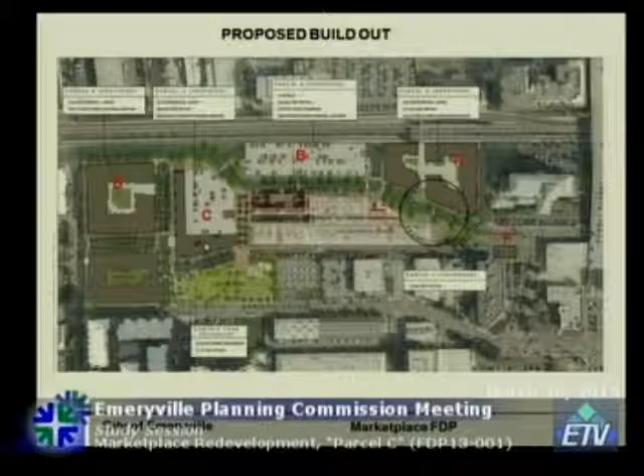At this point, the applicant has revised its phasing, and I'll talk about that. In terms of how it's actually going to pan out in construction, the first thing that's going to happen on the ground is the relocation of the Shellmound Street. This will be followed by construction of the grocery store, which is on Parcel C, and that would be without the residential component that is associated with the grocery store.

The third item would be the construction of the redesigned and expanded Christie Avenue Park, which the Commission has approved in the past, earlier this year. This would be followed by construction of Parcels A, D, and then the residential component of Parcel C. And the last stage would be construction of Parcel B, which is the garage building, and the retail pad, which is known as Parcel F.

So today, what we are going to be talking about is only Parcel C, which is the grocery store plus residential development associated with that, as well as the realignment of the Shellmound Street.

In terms of the past study sessions, in December of 2013, you first saw the first study session on this project, and that included both Parcel C and B. This was followed by another study session in December a year later, which was on the overall scheme of the proposed Marketplace Redevelopment Project. Then in January of this year, you saw an FDP study session for Parcel B and C and the realignment road.

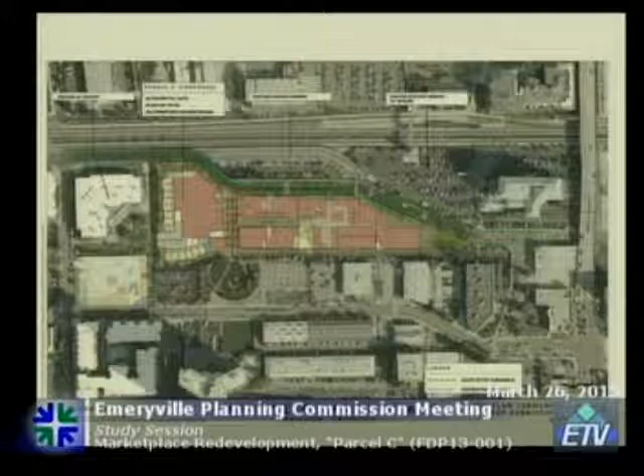What you're going to be looking at today is a more refined proposal for this project, and I'll go through the various modifications that the applicant has made in response to the comments they heard at the January study session. This is the Parcel C rendering, and this is the first floor or ground floor plan, where you have the grocery store in red, and townhouses on 62nd Street and on Market Drive.

In terms of modifications, what you see today is a reorganized loading to separate grocery loading from the customer and resident vehicular traffic. There would be a truck bay with a gate that would be closed a majority of the time. There are further defined loading areas for the grocery store on 63rd Street, and truck templates have been provided in the packet. This was directly in response to how the loading would occur and whether that was feasible or not. You also have circulation plans that more clearly show the operation of loading, service, and trash pickup, as well as vehicular, bicycle, and pedestrian movements.

Site plans and elevations of the grocery store before the residential component is added are also provided. This was again in response to the Commission's comment regarding what the building would look like between the time the grocery store is constructed and the residential is added. More refined unit plans have been provided, and a more developed rooftop amenity area is proposed, identifying a bocce court, vegetable garden planters, a covered outdoor kitchen, and a barbecue area with seating.

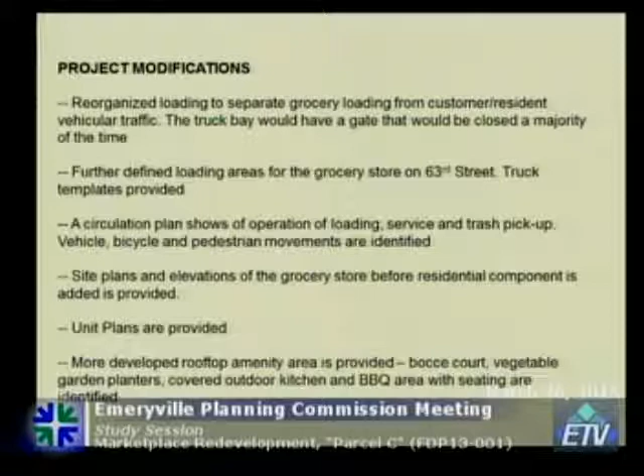In addition, there was a discussion on how the delivery details would work for this particular grocery store. Keep in mind, we still do not know which grocery store, which tenant, will be going in, but in terms of delivery, this is what we have.

On weekdays, it will be 3:30 a.m. to 1 p.m., and on weekends, 4 a.m. to noon. There was also a discussion last time about the backup beepers.

This has been identified as a concern for the adjacent residents, regardless of where the loading dock is located. In response, the applicant has indicated that all the residential units on the north side of Parcel C, as well as on the east, south, and west sides of Parcel D, the theater site, would receive noise insulation treatments that would block both the railroad noise and the backup beepers.

Do keep in mind that adjacent or kitty-corner to the grocery store, you have the Emmy building, which is almost constructed, so that's already there.

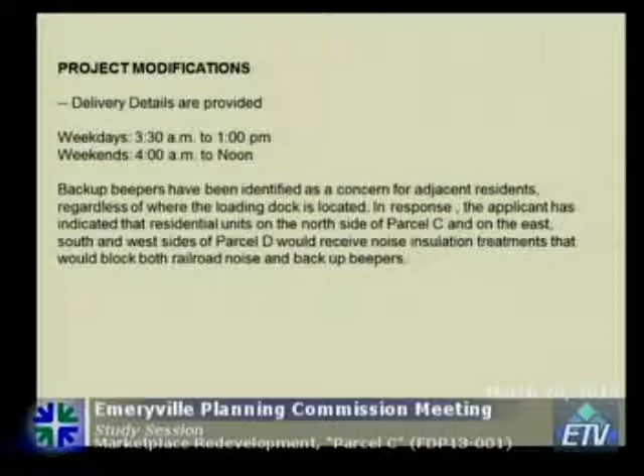I will now hand over the presentation to Arnold, our design consultant who has been working on this project. He will go through his comments, which have been outlined in the staff report.

Good evening, thank you. I'm not going to try to take up too much of your time. I want to point out a few things and let the project architect present their project.

I just want to start with the current proposal. Just to note, I've probably seen this in the plans. On this one, you notice it does show the double entrance point into the garage, and it does show some slight changes in the layout of the building footprint on the Shellmound side.

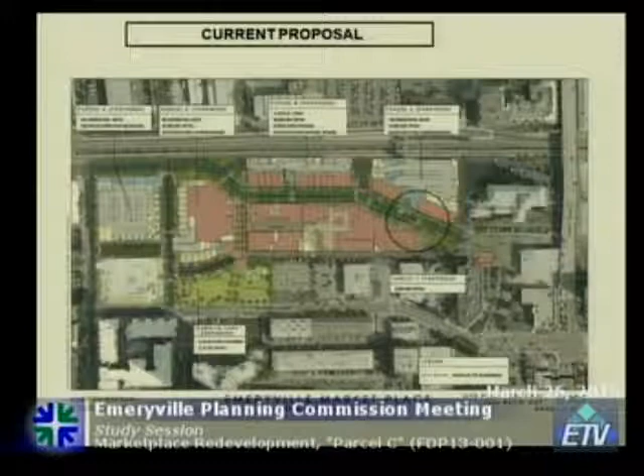And I'll move forward, and you can see it here where they have the two entry points now. So it's a little bit wider than it was before, so there's a visual effect on the street there. And also the entry into the grocery store, you see it was previously curved at that corner. Now those two things have been straightened at that corner.

So we'll come back to this. And there was one more townhouse along the 62nd Street side. So they dropped from like 8 to 7 on that side.

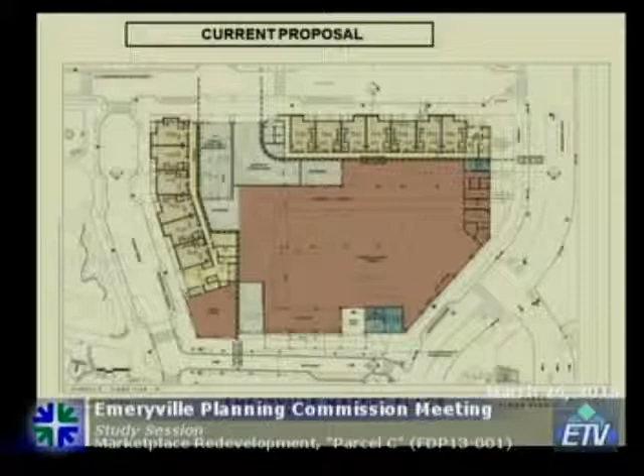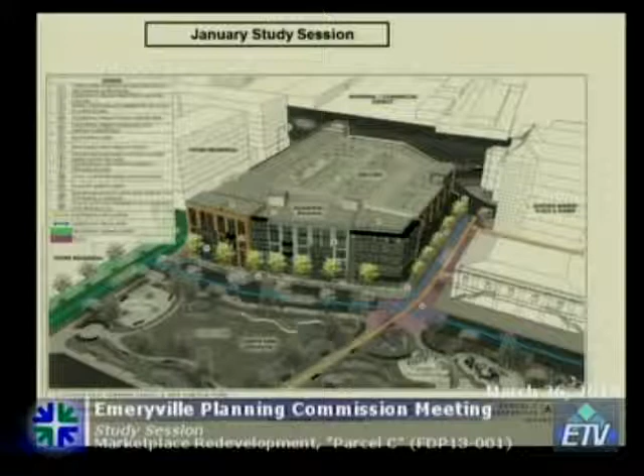And then when you're going to the current proposal, one thing I want to point out is the amount of mechanical and the size of mechanical things has increased quite a bit, so there's a concern about their visibility. You see that they're on the front side near the entry to the grocery and possibly visible from Shellmound. So I just wanted to make sure everyone was aware of that.

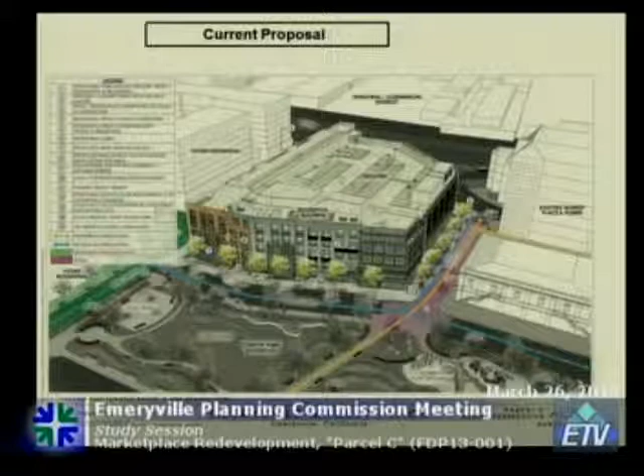This was the January study session, kind of perspective, a very nice perspective, and it showed an intention to curve that corner so as you came down Shellmound, you get a real sort of good identity to that building, and something at the top that connected into it so it would go through and up to the penthouse where the access was.

Now this did show the areas to the side that were open, and they've changed that also. But there's been some changes. Again, this is the January version.

You see the roof level configuration of the access down and the ground level, and then the elevation there. You also notice on the elevation, at the far right side, there's a brick at the corner, facing the park also as it turns that corner.

Now you notice in the current proposal, it's changed quite a bit where you're not getting that curved feature. The building's been straightened out. The identity is not quite the same, and the penthouse features are more of separate structures on the roof. So there's a concern that maybe it's taken a slight step backwards in this area in terms of how that experience might be coming down Shellmound, and that would be something we wanted to point out for your comment.

Can you go back to the January proposal for a second? I just want to, okay, thanks. Okay.

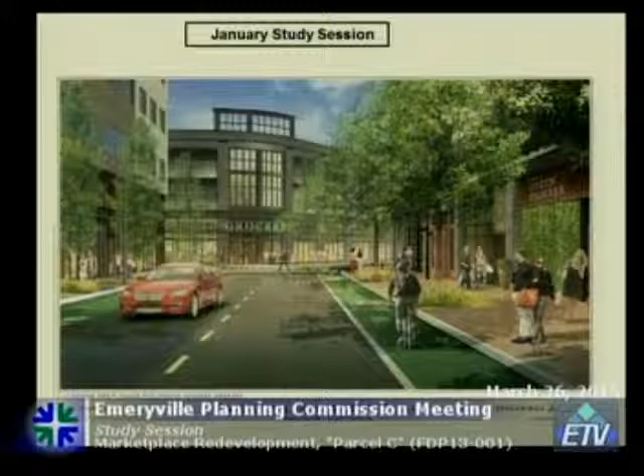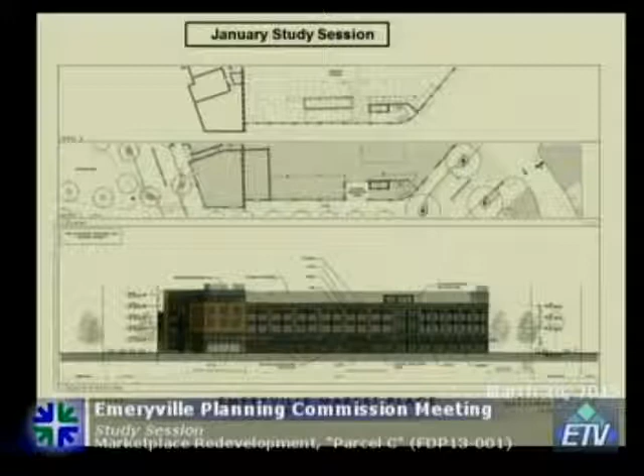That was the entry. If you look at the top drawing, you see the stair and the elevators, and they had the facade kind of continue up to contain that on the outside, whereas on the current version, it's a set back penthouse. Now it's set back from that, and they also have a kind of canopy created up there.

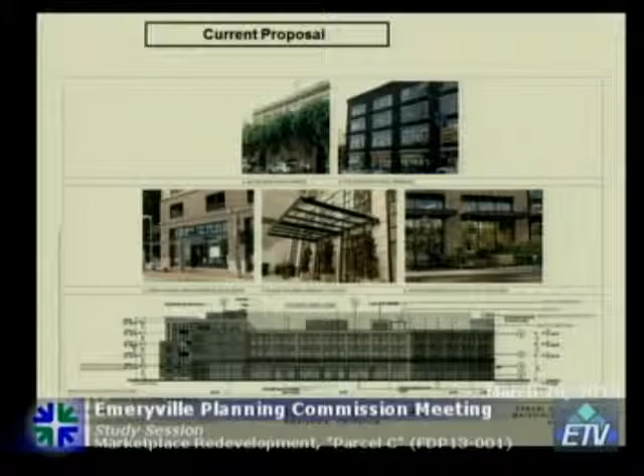This is just the elevation that's currently proposed, and the shaded areas up top show where those mechanical spaces are, almost at the center, and then the access point is a little more to the right. Again, you can see in section where those things occur and the relative height of those elements. So that element seems fairly tall, so that's part of the concern also.

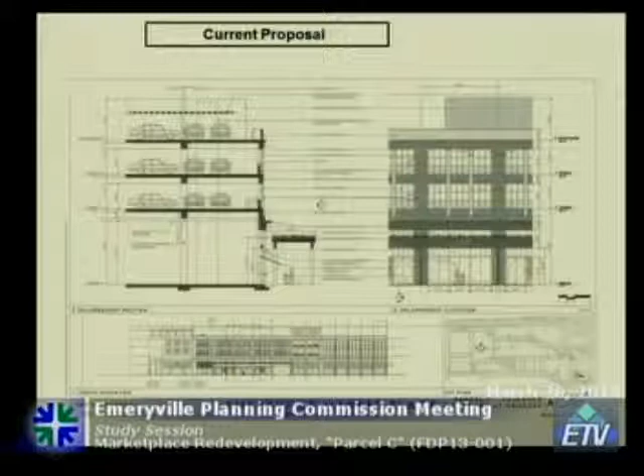Okay, and you're also seeing the grids that they put in to mimic the window frames. That was a change from the earlier one, which is a positive change, I think.

Wanted to go over a little bit of the park side too. You notice here, the main point is the brick is at that corner, wrapping the corner in the January version, and at the top, it's hard to see, but there's a trellis that wraps all the way around the corner. Now on this latest version, that's been changed to more of a stucco presentation, so you don't have quite the contrast or the anchoring of the corner that you had on the other one.

So to go back, hold on a second. There was the brick, and then the metal and the brick, and the upper floor was set back and of a different material. Now it's sort of blends in with the stucco.

And then there were some concerns about how the development of those trellis elements really comes across. They don't seem right now to be developed that much, so we would be looking to see what those are really going to look like.

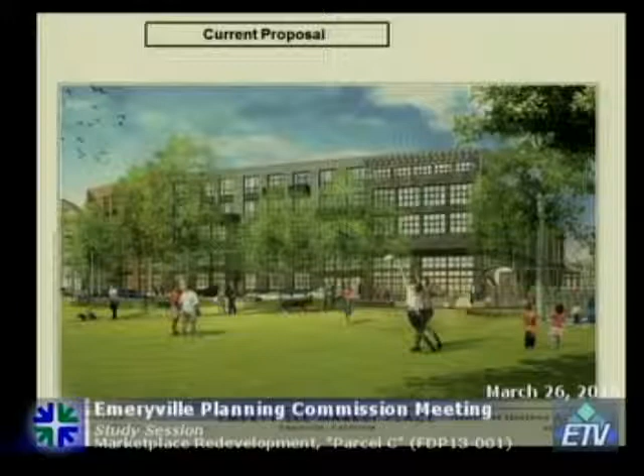The other street, which faces Parcel D, so we have the townhomes facing each other on a residential street. This was the January session. The main point I want to make is that the top level was set back with a continuous trellis all the way along, so the scale was a little bit different, giving more of a horizontal presentation.

And in the new one, it's still attractive and has nice massing, but it's just a little bit different, and they're accentuating the vertical elements a little bit more. Again, those trellises up top seem like they're maybe just placeholders, not really quite what they might be.

Also, on this one, I want to point out the window frames. This has that warehouse type of aesthetic a lot more, and the windows look like warehouse windows. You typically would see those metal windows in this image.

And of course, here's just the elevation. You see the pictures that go with it. They're showing some typical window frames that you might see in that type of building.

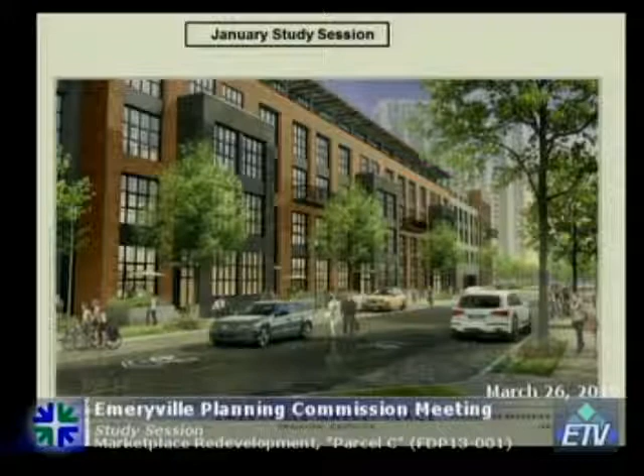Could you flip that elevation back to the January version just quickly? This one? Yeah, that one. Okay, thank you. Yeah, I just want... yeah, I know it's a lot. Okay, so I'll go back. So then, this is the current version.

Is the plan the same, or do the floor plans change too? The floor plans, I believe, are pretty close, except at the top floor, they're a little bit different. The units have been evolving. In fact, I want to mention that some of the comments about the unit plans were actually on an earlier set of drawings than the ones you received. So if some of the comments seem to make no sense at all, it's for good reason, because the units are different.

But I think they're working on the units, and they're working on the massing of the building too.

The one other thing I wanted to call attention to in this drawing is the entrances to the loading and the vehicular access coming in off of 62nd. Of course, it's much wider now, so there's some concern about breaking that pattern. There's a door, I believe, on the loading, and we don't have much information on what that's going to look like, but having these two large entrances next to each other does kind of break that pattern a little bit, and that's a constraint that just has to be dealt with as best as possible.

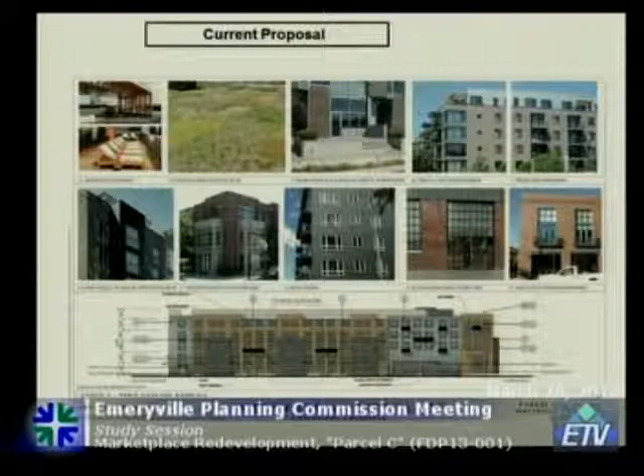This image, I wanted to talk about this one briefly, and I believe, hopefully it's still current—you guys will correct me if it's not. This was from the end of February submittal.

The two issues on this one: one is the windows. This calls out vinyl frame windows, so we don't have much information on those yet, but typically with vinyl sash windows, without really seeing exactly what these frames look like and how they fit in, it's unclear if they're going to portray the character of the structure, or if they're going to look like something different. So that's something there's a concern to clarify.

The stucco and the brick and the setbacks all look like really positive features, giving it a very urbane look to the building. We don't really know what the stucco finish is going to be like, and we're interested to find out more about that. But the windows are an issue.

A second issue is privacy. You'll notice that for the units along the street, the plans currently call out an 18-inch level change from the sidewalk to the unit, and what we don't know is whether 18 inches is the minimum or the maximum, since there might be some sloping on the street. 18 inches is not very much of a level change, so you have the problem of people looking into the units. Our recommendation is to increase that to at least 24 inches, because we want the windows to be as big as possible—these are very deep units and we want to get as much light into them as possible.

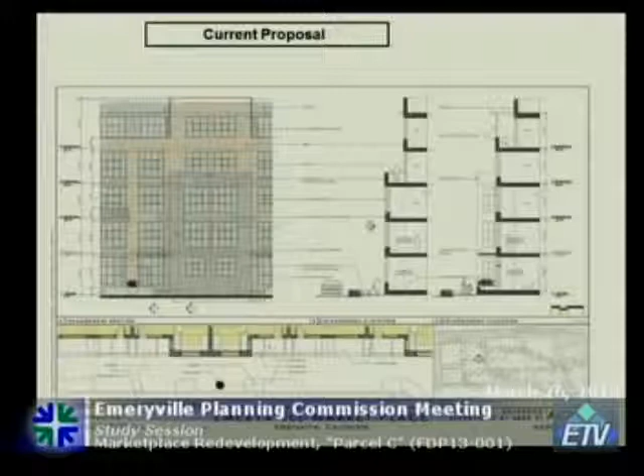So this privacy issue is something we'd want to see looked at, and preferably raising that floor level some. These are the current units—only want to make a few comments. These are the ones where I was mentioning comments in the staff report were from a package slightly earlier than this, so it might not match in all cases.

A little bit of a concern on some of the units—these are one-bedroom units, I really don't want to look at those right now. These units are mixed up, but on the two-bedroom units, there's a concern about the table and living area not quite being big enough to really function for a family. You see that you have a sofa and a small table, and those dimensions are really tight to actually fit more people in that unit.

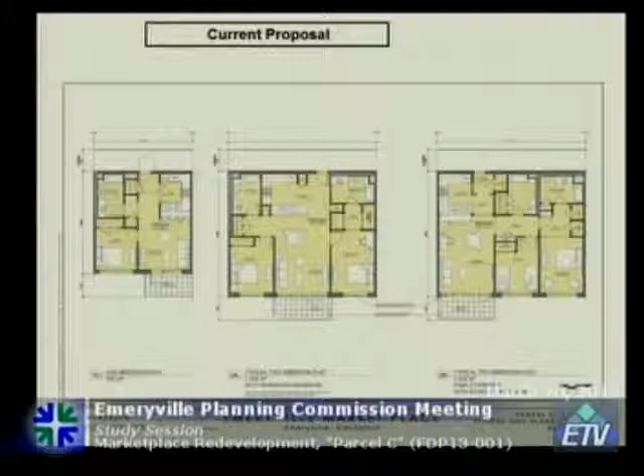You might want to notice how little space—it's a pretty big unit, but how little space actually ends up being in the living and dining area. It's only less than a quarter of the unit, around 20% of the unit on the 2B example. So that's kind of a struggle point, and at least with those units, I believe they occur facing the park. There may be opportunities to modify that—maybe rather than a deck out there, project out a bay feature or something like that to give a little more space to those units.

This is showing some of the townhouse units.

One of the things I wanted to point out is Unit C. Staff really likes that unit. It's a nice elongated corner unit that seems very well laid out for family-friendly living. There are 4 of those units, between 2 and 3 bedroom, making up about 38-39% overall, but it's mostly 2 bedroom.

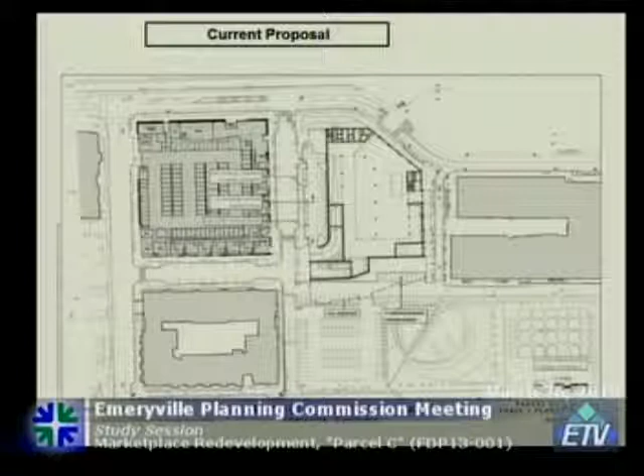Lastly, this is an area where there's not much information on this first phase and how it's really going to work. We have a parking area on the back of the grocery store, a loading dock, and the garage entry. The previous discussion was to provide some sort of temporary facade, and right now we're not really sure what that is beyond a concept. So I guess we're all looking for more information there. I think that's as much as I thought would be useful to say, unless you have any questions.

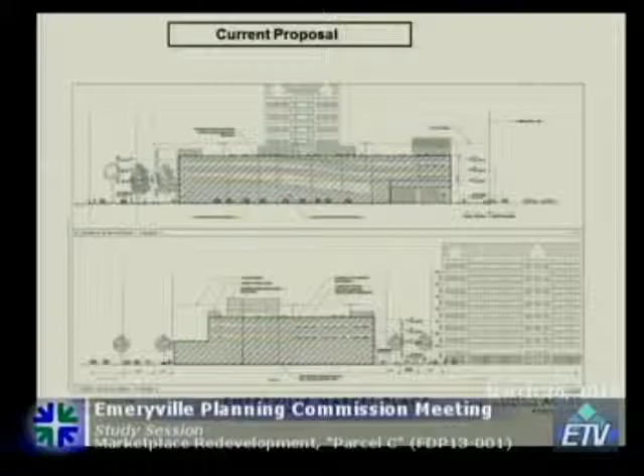Is there any kind of traffic study done yet relative to delivery trucks? Yes, we are doing the study. We don't have the results yet, but we expect that to happen very quickly, and we would have that cleared up before this project comes back for consideration.

There were some staff recommendations. One would be to go back on that front facade by the grocery store to something closer to what it was. Two would be to address the mechanical things that might be visible from the street. And three would be to go back to brick on the corner between the park and in front of the grocery store, so it gives a more balanced material presentation.

I have a question. I'm curious if you can point me—I've kind of scoured the East Bay, and I've yet to find a good example of a project that has sufficient grade separation for the ground floor residential units where residents feel comfortable opening their blinds. So I'm curious if you have a good example.

I think you're correct, it's very hard to find a good example. It's been an ongoing problem. The Essex project has that problem, and when I walked by those units, they're all kind of covered up. People are renting the units, that's not an issue, but they're all covering up the blinds. So it's a very common problem. I wish I knew one in the East Bay that really achieved that objective. It's just something we're struggling with right now. Thanks.

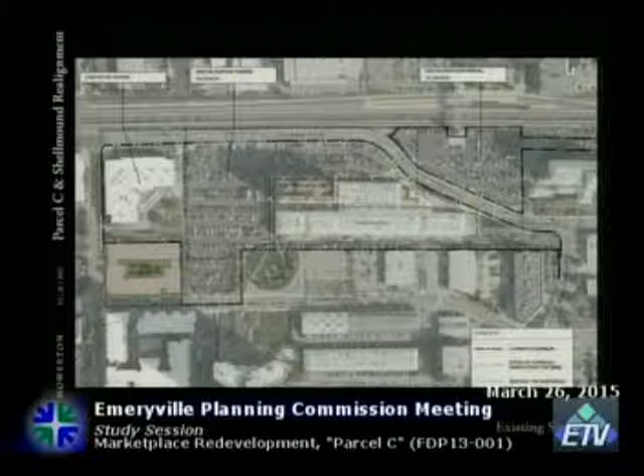Right out of the gates, Commissioner Gunkel, we work constantly, so there are things in tonight's presentation that are not in your package and staff hasn't seen. It's constantly reacting, and even the comment about family-friendly housing is as recent as 24 hours. So we're working through what we can while retaining the basic tenets of the building, what we think is already successful.

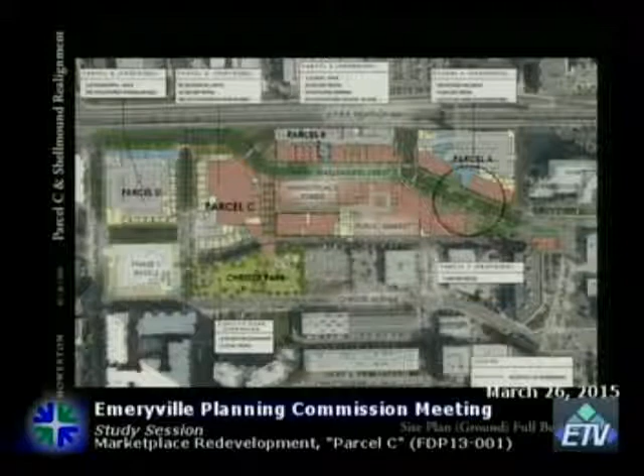Where we're going is clearly this is the first big step towards creating a cohesive urban neighborhood that has all the pluses and challenges of an urban neighborhood. But our direction is to create a place that truly feels of the place and doesn't look like it's been dropped in from somewhere else.

And so the character of the inside of the public market when the renovation's complete, or the base of Parcel B, or even Parcel F, or Parcel A on the upper right, is to try to create a connective environment that truly feels like a real place and not like a fabricated vision of some other location.

The project, of course, has been going for a while, so the PDP approval dates to 2008. Mark and his team got involved a couple of years ago. We actually first came before you December of 2013 with an FDP study for a one-story grocery store and 30,000 feet. Some of the pieces have changed, and we've been plodding along trying to get clarity with the park approval underway. I think a lot of the pieces are starting to lock in, and now we're hoping to get the grocery store and road approved so we can get into construction later this year.

There's clearly a lot of components coming at you at the same time, and so appreciate that when you give feedback to folks on Parcel A or Parcel D, we're trying to roll that into what we're doing on Parcel C as well.

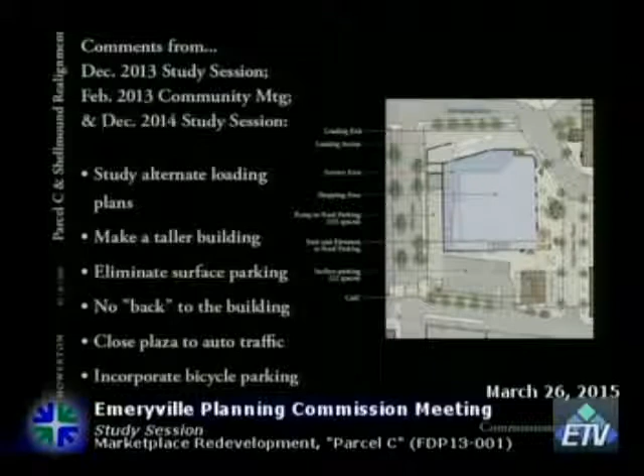So when we saw you more than a year ago, there was definitely challenges to loading, and there was a lot of feedback that a one-story building wasn't the appropriate density for this site. So when we came back to you, it was a multi-story building with a residential wrapper. Again, we have a site with no backs, so if you have no back, you have to have all front, which gets challenging with something like a grocery store, which in our conventional experience always has a pretty unsightly back. So in this case, the back is enveloped into a multi-use building.

Some great feedback we got in January was, what is an appropriate family-friendly mix? Solving the deliveries is obviously a key component. There were certainly comments that the rendering at the bottom of the screen from January looked too much like a ballpark, or a parking garage looked too much like a parking garage, and that is the challenge. So a lot of our work has been, how do you make it look like a warehouse building, like a building that made sense in a place that has an industrial heritage, and yet isn't an industrial building and isn't overly nostalgic. And then there's the big outstanding question of how quickly does the residential wrapper come in, and what does it look like in the interim?

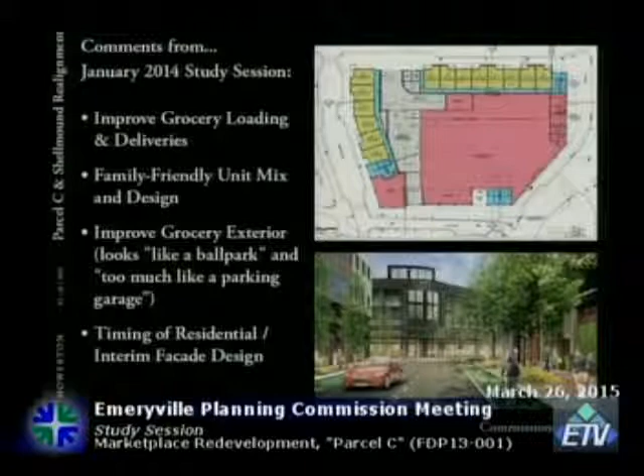To just tick through the changes, I think they highlight a lot of the issues. Again, some of these are a couple of days old and some of them are 2 months old.

One of the staff comments which we appreciate is that we looked at the myriad of delivery vehicles and how they might come and at what time of day, but key to that was, how does the occasional big truck get in? And by big truck, it's not even a really big truck. It's not the big Safeway truck. It's still a notch below that, a WB50, but it's still here.

But suffice to say, for this sheet, there was a desire that the trucks not use the wide 64th Street and back all the way down Market Drive. It was to swing in from Christie or from Shellmound, and that there may be an implication on the bulb outs.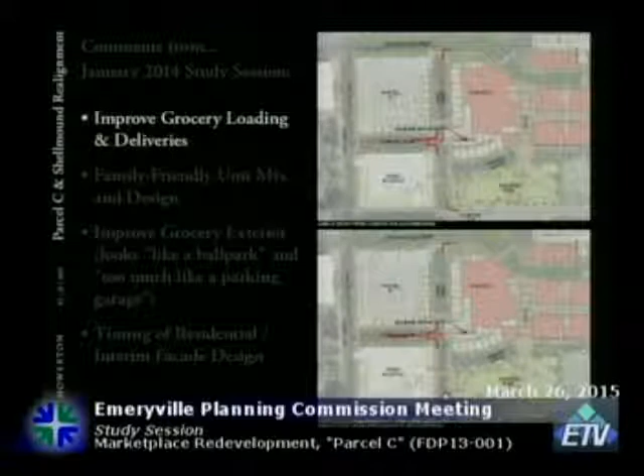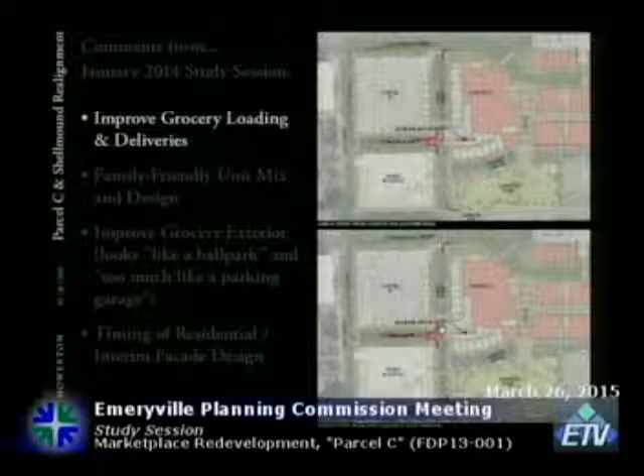Approaching from Christie, it's really challenging from the south because of the tightness of these pedestrian scaled streets. But if we shave the bulb out on the south side, which was put there to match what was being done on the north side, again, similar movements. So this feedback, which we got in the staff report late last week, we would certainly expect to apply to our updated package.

The delivery schedule—this is actually straight from the grocer with the names removed, so each text entry represents a different proprietor. The bread guy actually shows up every day of the week, and so do some of the other folks. There's like 7 different coffee people because there's every different coffee person. And then these represent windows because delivery guys aren't always on time. So in this sense, this looks like a lot of red, but it's only one person who delivers at some point over that window.

Keep in mind, this is a delivery schedule for an urban store 1,000 miles from here and isn't necessarily representative of what would happen here. It's simply a communication tool we're using to see you through. You get a sense for a series of morning deliveries of largish trucks, and the bulk of everything that shows up comes in small vehicles - vans, 20-foot box trucks, pickup trucks - over the course of the day. So we've allocated some space on the street for that. This schedule was provided to us from the grocer, representative of an urban store they operate, and they suspect it would be very similar here.

Does that help, Commissioner Moss? Yeah, I think so. So I just want to make sure I'm reading this right.

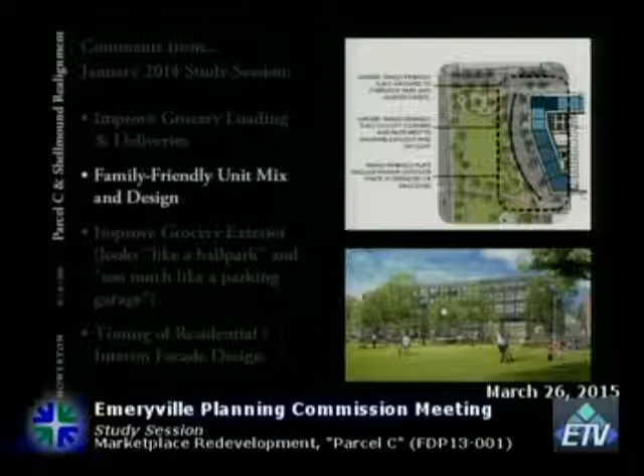Another question, and there's been a lot of dialogue offline with staff and Arnold and others about how you design more family-friendly units, and what does it mean to have a family-friendly unit versus a 3-bedroom that's really great for a bunch of college kids. And frankly, what you do for a family is what anybody else would really enjoy too.

There's a spacious vestibule that's big enough for a stroller. There's washer dryer, and they tend to be, if they can be side by side, great, because there's more room. Living, dining, kitchen works, and there's places to do homework. So a lot of the revisions to our plans have been to incorporate these features at each step.

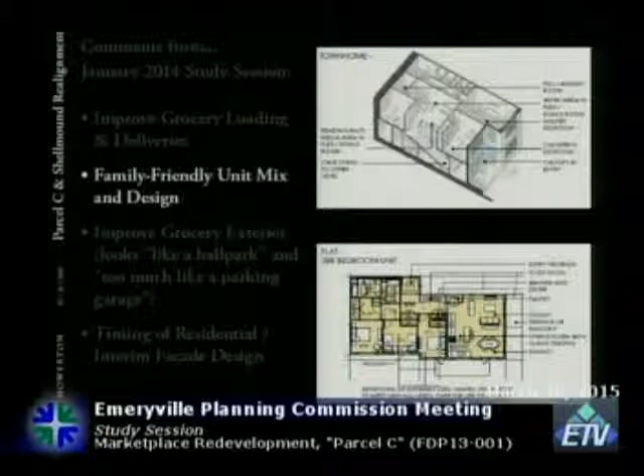Now, it's still urban living, and there are still some trade-offs that one makes to live in an urban setting that's different from a suburban house. But in large part, we think that the kinds of units and the space we're allocating and the dimensions we're providing are giving the potential for that.

And then, how do you translate that outward? So one was to think about a roof amenity that was private to the residents, that took advantage of the views to the bay and the city, that took advantage of views overlooking the park, that had the kind of activities that we think folks who would tend to live here would want to do. So it's space upstairs for a birthday party, playing bocce with your kids, just places to hang out or maybe have a little vegetable garden.

And then a big change that has come into the plan in the last couple of weeks is that the grocery store, because it has a lot of prepared foods and fresh foods and on-site cooking, would prefer that there not be a cafe next to it. And so, okay...

That's challenging as a retail project, but it's also a great opportunity to improve the residential. So what I'm showing here in the lower corner was all formerly the retail space, and the concept of adding an additional townhouse with the potential for an amenity. This townhouse would be a 3-bedroom because it would take advantage of 3 bedrooms upstairs.

And that would be a club room, or a place to do any kind of resident activity, but it would present itself to the street much like a commercial entity. So you'd have a great wall of glass and activity behind it.

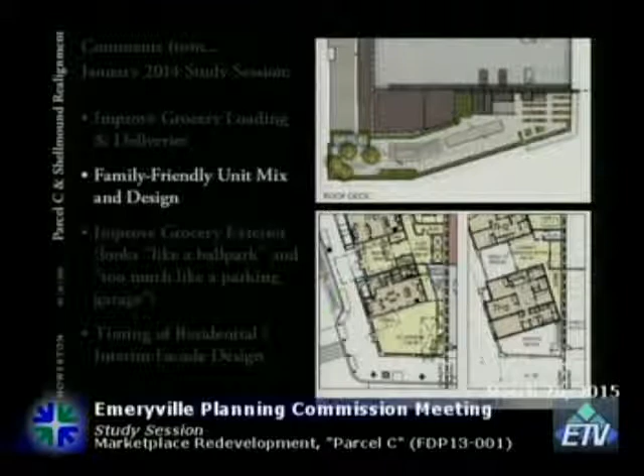All within the same envelope and basically the same exterior appearance that you have in front of you. We took a lot of feedback from January and other meetings around that same time that it was looking like a parking garage.

So one of the things we've taken a stride at is looking around Emeryville. Emery Tech does it well, and we think we can do it a little bit differently. We want to create a simple articulated facade that gets away from the typical proportions of a parking garage, because the problem with a parking garage is it looks like a parking garage because it's very efficient. So if you take strides to change the proportions of openings and use materials in a way that doesn't look like a parking garage, it's really about getting in and changing their proportions. That's one of the things we're trying to do.

We also felt like more blue sky at the end of Shellmound was helpful, so we shifted the staircase. It also helped with the operations of the grocery store, and it helps us do a Shellmound door to the grocery store for circulation, and a plaza door to the grocery store. A little bit of that is evident above.

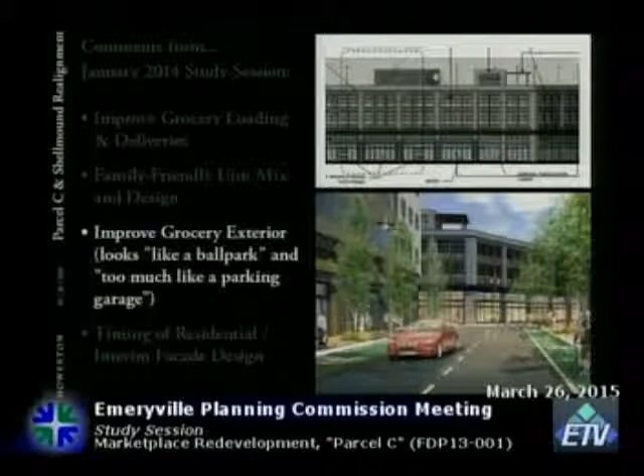I think Arnold's comments on the mechanical enclosure are appropriate. We were being conservative, and we made this extra tall to protect views from the neighboring offices, but we can certainly continue to refine how it presents itself from the street.

In terms of what the back looks like in the interim, the objective is to deliver the shell of the grocery store to the grocer in January of 2017, allowing them enough time to fit out the inside and to commence work on the residential component within 6 months of that.

So here they're showing, it's kind of showing a handoff. You'd effectively go right into construction as soon as you got a temporary C of O on the grocery store. And if that's the case, we feel like there's really no need to dress it up, because it's a pretty straightforward build out to frame up a stick residential wrapper.

As a backup, in the event that something goes awry, we thought that beyond a certain window, a temporary scrim would be used - basically we want to find an artist and a design that's appropriate for this place. We haven't hazarded a guess on what that is yet. Here's a couple of examples - I'm sure you remember when the Washington Monument was reclad in construction scrim. This isn't it, it's a different building that took the same approach, but there's a lot of flexibility with these construction scrims. The idea is that something like this, not inexpensive in itself, would be a great interim solution to tee up what's coming.

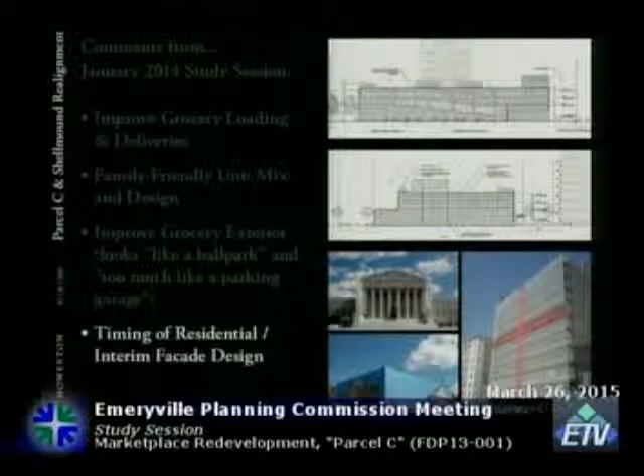As part of this, we created a duplicate driveway, effectively, for the cars. And in doing that, we lost a townhouse. We're hoping to pick it up here, so in a second I'll show you that.

Some of the other changes - we got great feedback from you that employee functions of the grocery store should have windows and really present themselves to the street to activate Shellmound. So we've done that, and things like their lockers and break rooms overlook the biofiltration treatment area. Other than that, the plan has stayed largely along the lines we looked at a couple of months ago, with the exception that we've really refined how the unit plans work and how there's a whole variety of them and how they play together.

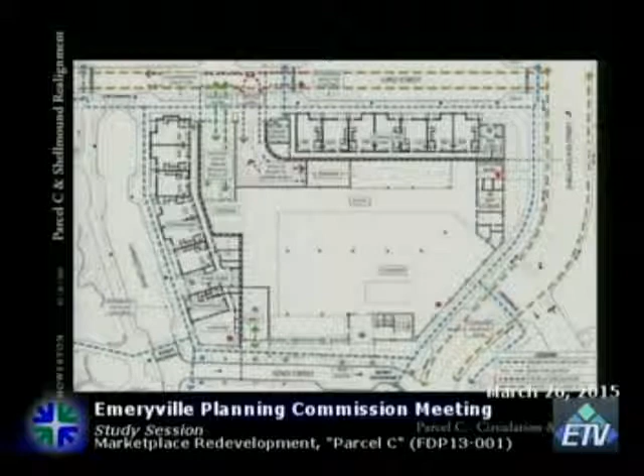This lobby also buffers the residential a bit from the train tracks. Typically, it's all ground floor townhouses, each with a stoop and an independent entry. Service, both utility and trucks, is organized right here at the end of Market Drive. This mechanical is actually for the office building across the street, that currently lives in a bunker in the middle of the parking lot that needs to get relocated. When that office building was built, they just put it in the parking lot instead of in the building.

So we're embedding it here in a new bunker. Going upstairs, this is the double height of the grocery store, about a 22 to 23-foot ceiling. You're seeing that townhouse we added, which is 3 bedrooms on the upper floor overlooking the park. Generally, the beige is residential, and these are all the upper floors of townhouses on this level.

In section, you get a sense of how it goes. The garage is matched to the residential, so a typical residential floor to floor here might be 10.0 to 10.6. Because of our garage, we're at more like 11.6, so the capacity for light to come in through the windows is significantly greater, since our windows are a foot to a foot and a half taller than you'd normally get. That's a convenience, so residents can park on any level and walk right into their floor, but it has the upside that it also gets the residential building a bit taller to block any views of the parking from Parcel D.

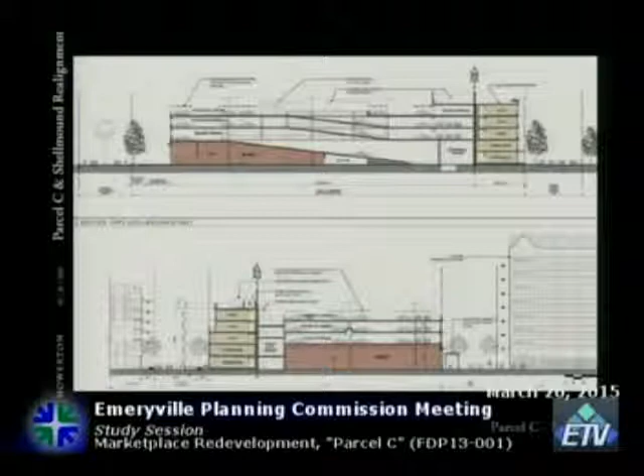Can you go back to the last slide for a second? Yeah, sorry, what is that sort of blank space?

It has a TH3 in it there. TH3 is a unit plan that's not fully resolved. It's townhouse unit 3 that we know fits here, but it has a lot of wonky angles that we just haven't populated into the drawing. Sorry, okay, thanks. We know it exists, we just haven't figured everything out yet.

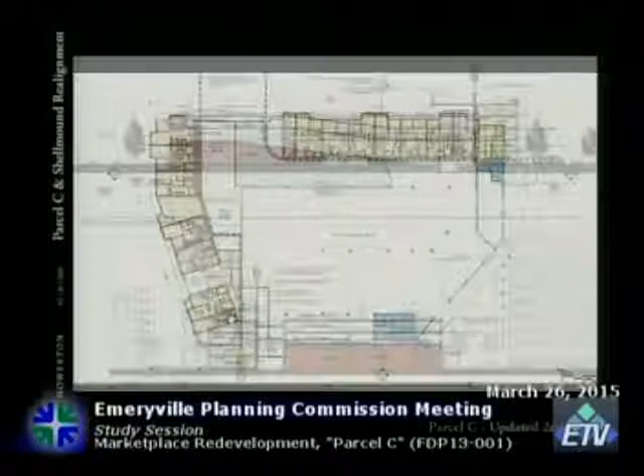On the 3rd floor, again this is the first parking level. The idea is that shoppers would have come up and arrived here. This is slightly different from what's in your packet, and again it's part of the ongoing conversation of how do you deliver best-in-class grocery, best-in-class residential. So everyone would arrive here. This floor would be primarily parking for grocery store customers.

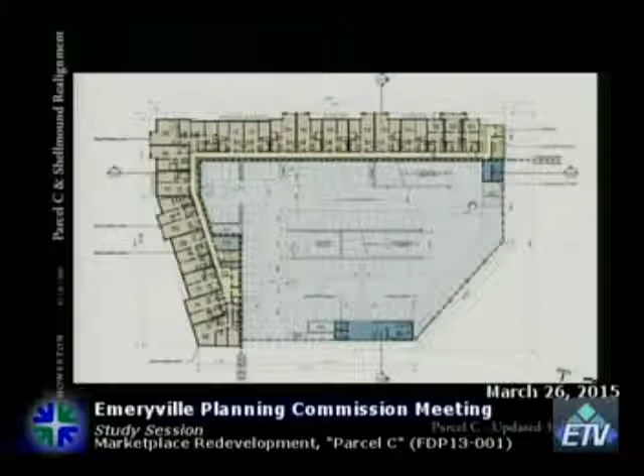There would be a ramp up to additional parking. But if you recall in your packet, the ramps were both stacked in this area, which really presented a challenge for residents to get easily up to their parking level. So what we've done is reorganize the ramp. It cost us about a dozen parking spaces, but it's made a much more efficient vehicular circulation for residents and a number of office workers who will work across the street and park here.

These are all flats, so all apartments, and then there's kind of nominal back of house space. Would the residential parking be gated separate from the grocery store parking? It would be. Great segue.

So if we go up one level, this would be the 4th floor of the residential building. Residents would come up to this level, and again, this is an inefficient parking garage, but a very preferable residential scenario where there'd be gates and key card access to get up to the roof, which is the residential parking. This floor becomes overflow for the grocery store, as well as spaces we can assign to the office building. Again, this is part of managing the parking as a site.

Again, it's similar residential flats, but with slight tweaks, because there are ins and outs and lots of different things we're doing on the elevations that affect how the units lay out. So although 1A and 1E have different labels, they're very similar.

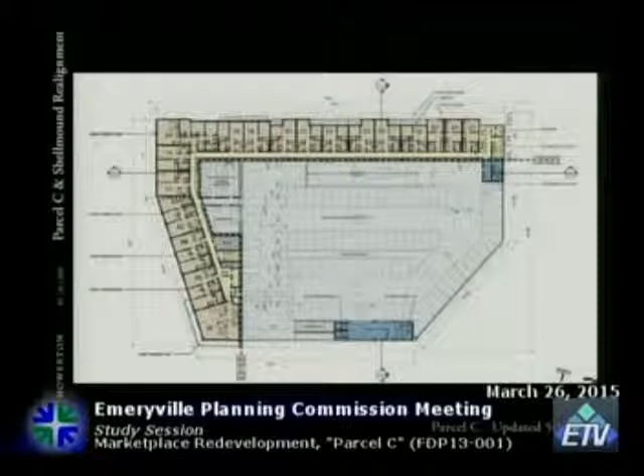And then finally, the rooftop level, where on the top residential level we identified a pretty significant space for bike parking as well as mechanical, and we roofed that bike parking. So this big gray blob here is actually bicycle parking, not mechanical. The mechanical's been strung out here and here.

It's not a very large building, 65 to 70 units, so the amount of amenity space we were trying to right size, and this seemed like the right size and preferred orientation as opposed to this north leg. So we've left this north leg as really just a second means of egress, and this is where we'd focus activity.

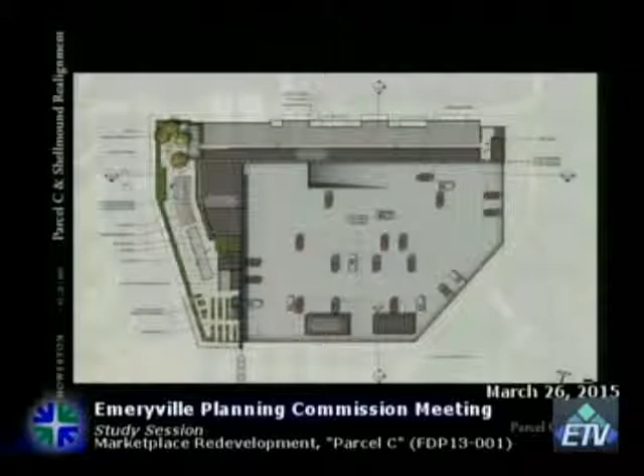And we started to envision what it is up there and how it feels, and we think it can be relatively simple and have a profound effect. It's actually a rooftop right near our New York office that we looked down on, so we knew it well. We got a photo, and some other projects that we're familiar with that we think were pretty successful.

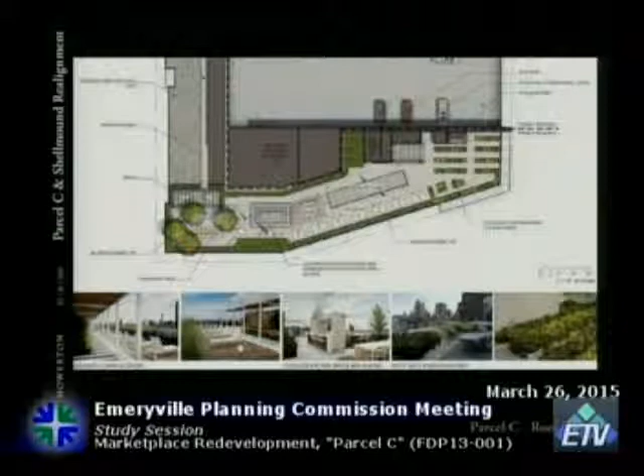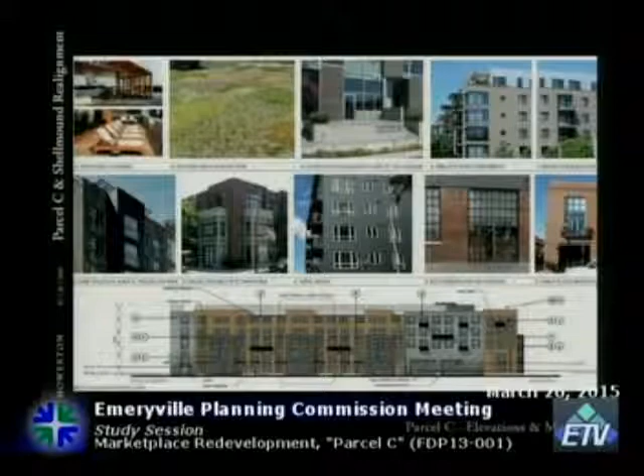We are developing this at all levels, trying to give variety to the building that privileges certain units so there's a variety to the experience of living here, and it's not just a repetitive same unit stamped out. So where we can expand a bay, create a terrace, or pull the building back to create a terrace, we've tried to do that.

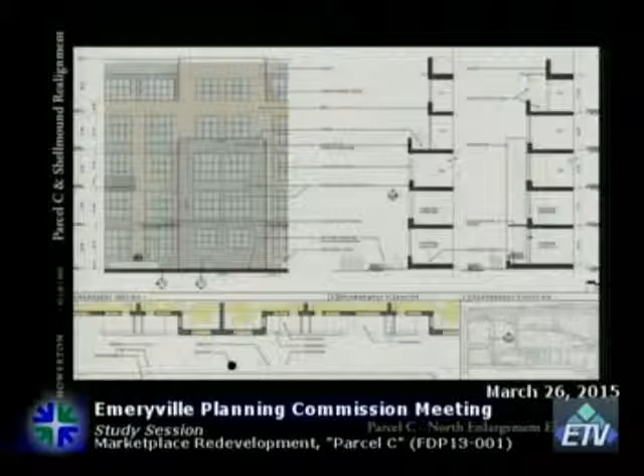Generally we've said 18 inches minimum grade change from townhouse floor plan to street. I think the comment to go to 24 inches is great. Anywhere over 3 to 4 steps starts to be a little arduous to bring groceries in and other things. I think my years in a 6th floor walk-up have ruined me, and I think 3 steps sounds terrific, but I appreciate there are trade-offs to privacy living on the ground floor, so if 24 inches is preferable, that's definitely something we can accommodate.

The idea is that we're creating a very residential street on 63rd Street. It ends with the park, and the entire experience here should be about connecting back to that park.

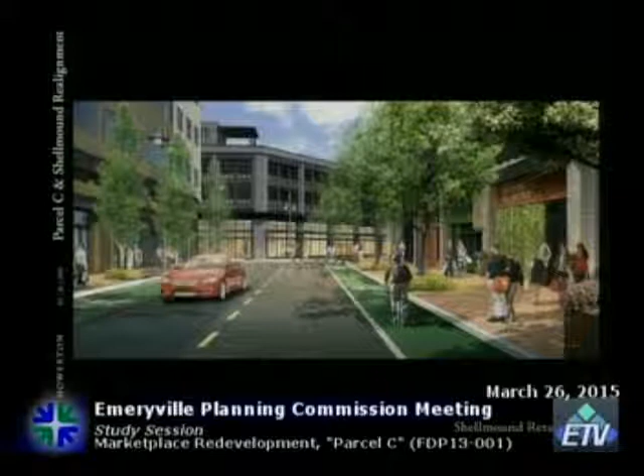And again, the idea is as you come north on Shellmound, it's still very clearly an urban setting. It's a very visible grocery store, but you get a little bit more blue sky than we had before. The other facades have gotten further development, whether it's the typical back areas like the employee areas of the grocery store, which are now more fully glazed. Even the staircase, the secondary circulation element for the residential, has windows, albeit facing the train tracks.

And then we really like the balance of more brick on 63rd and more plaster on 62nd, with elements crossing over between. And so that's why we moved away from the brick here on this corner.

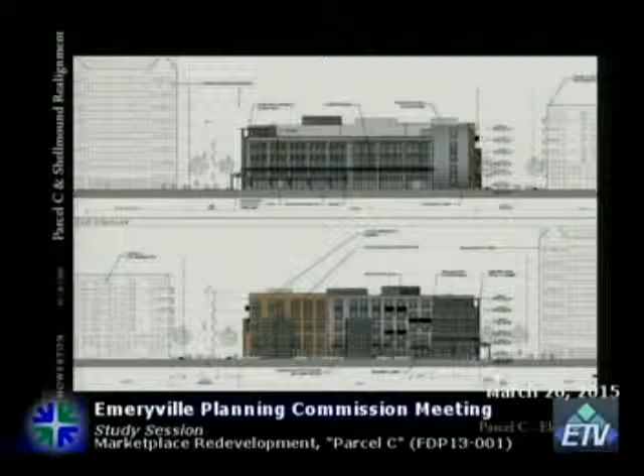I'm not going to belabor streetscape, but we've definitely-- it's not overly generous, but we think there's enough space there for residents to have a little planting area of their own, as well as the enhanced streetscape planning that we'll be doing.

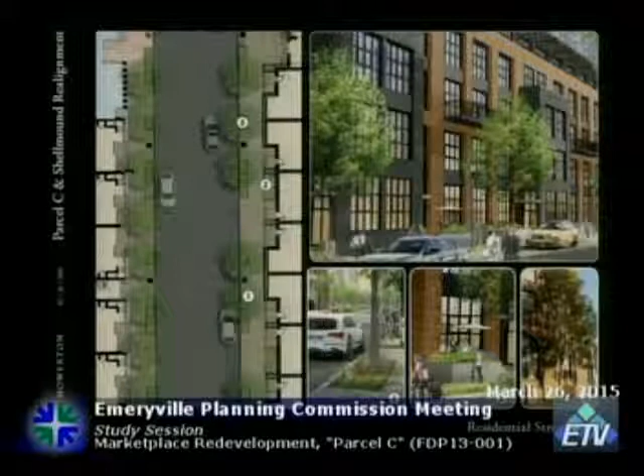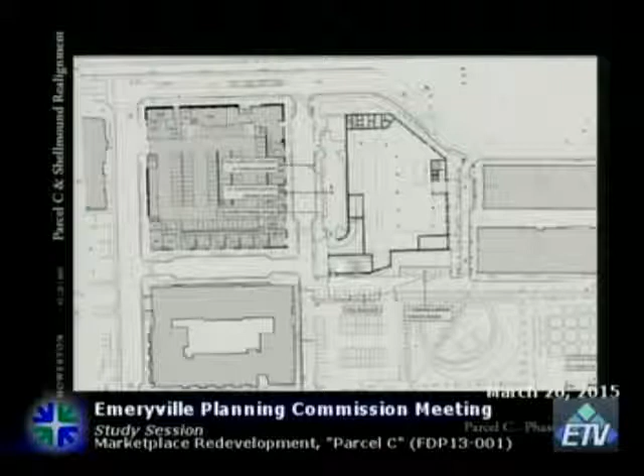So again, in the event that the residential building is not immediately green-lighted, the idea would be to put the curb in place so that it feels finished on 63rd Street, and that we would then break through the curb so there'd be on-street parking right away, and then we'd break through the curb, do some temporary parking up against the back of the garage, and then we would cover the delivery area in the interim until the residential building can be built around it.

And so these are crude. We didn't want to get into what the mural might be, but everything hatched would be under the mural, and you can see the doors to the loading areas are already in place, and here they are built out. So the intention is to conceal all the things that are meant to be concealed right up front, and then cloak this thing in a very fun, whimsical, appropriate kind of scrim, and we'd expect to come back and review that as part of our larger signage package anyway.

But the intent is to start the residential as soon as the retail's finished. That's what our plan is. This would be a backup plan if for some reason the economy fell apart.

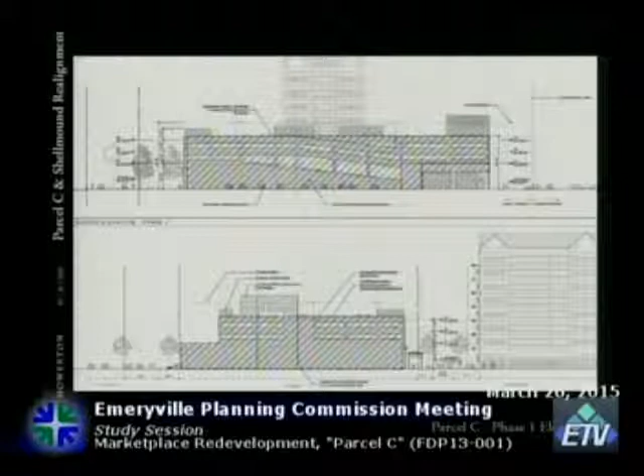Just a little bit on unit mix. So I think the package you have is the top mix, which has a mix of studios, 1s, 2s, and 3s, and that's around 38% family-friendly, if we say that family-friendly units are 2 and 3 bedrooms. The version I presented today, which had that additional 3-bedroom townhouse, is substantially the same, 38, 39%.

And then the update that is fresh off the press is that we could go to 65 units instead of 69, or actually 70 in the last one. And in doing that, we would convert a number of 2 bedrooms, especially park-facing 2 bedrooms, or sorry, 1 bedrooms, to 2 bedrooms. And so we could bump the overall mix of family-friendly to something like 57% by ratcheting down the overall unit count.

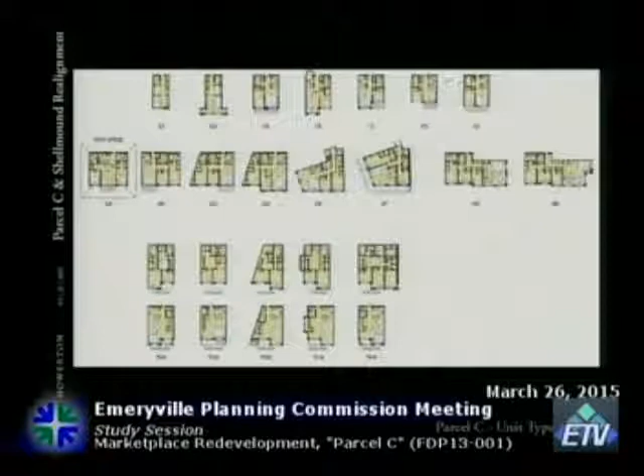We certainly looked more seriously at a lot of the comments. We had always anticipated some sort of covered entry, but now articulating a little glass and metal canopy over each townhouse stoop, so that you do have a dry place to take your keys out of your pocket and come in the front door. We're certainly exploring different ways to manage how the stairs and the elevation change works.

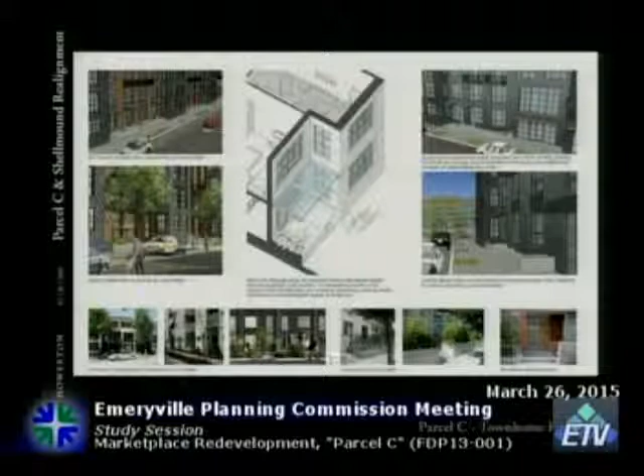Within the units themselves, we've really looked seriously at how do you create those kind of nooks for studying, for TV watching. One of the things we've done in these townhouses is eliminated the corridor on the 2nd floor, so the townhouses are extra deep on the 2nd floor, which creates this great little study alcove or TV room or whatever you have, which again is that second space. So you can have friends over on the ground floor and your kids can be upstairs watching TV, but not in their rooms. And we think those second spaces are pretty valuable.

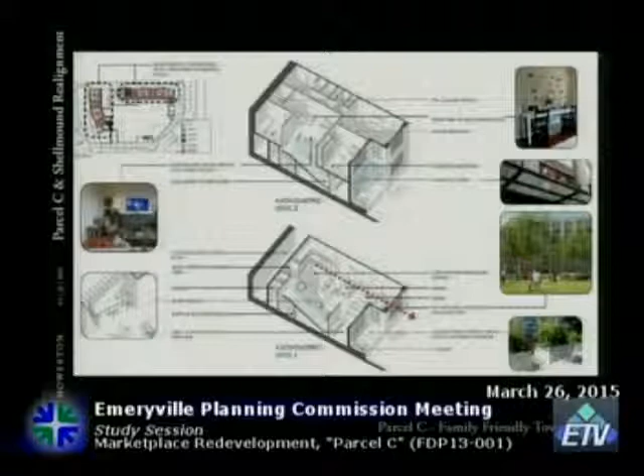Again, subsequent to some of Arnold's comments, and kind of always going on concurrently, we have our interior designer who's gone to work on furnishing all of our plans. So these are sort of, we haven't moved the walls, but it's another level of refinement of how people live in these spaces. And you start to see, with really ample seating groups, that these are very generous apartments. And the kind of room that you have for strollers and other things that are just facts of life as a young family are accommodated here.

So in this case, the ground floor is really kind of more formal living. The upstairs has more of, in addition to kind of the 2nd bathroom and the laundry room, which has even a counter space in it, a full den off of — so in this case, this is a master and a secondary bedroom.

There are iterations. So on the end, this is on 63rd Street, we have an opportunity where the townhouse abuts 63rd Street. So we flipped the plan and created more of a bay window with a staircase. Again, so you've got more light, more air, and that changes the unit plan upstairs. We have now 2 conditions with a 3-bedroom townhouse where it's, again, very similar living plan on the ground floor, but 3 bedrooms upstairs, and again with the sort of family den.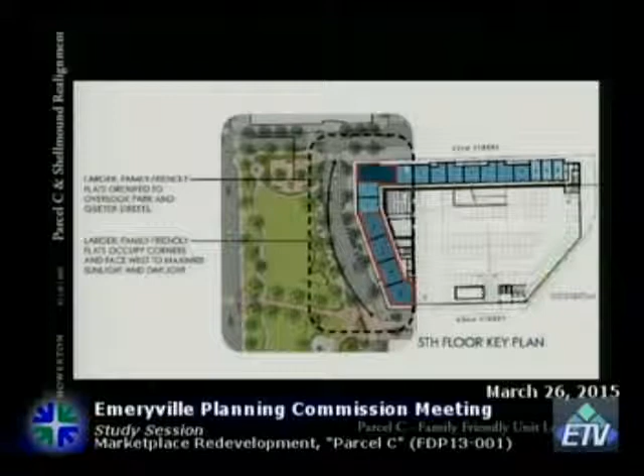So it's like, how do you translate all those great family amenities to a flat, which doesn't always give you that luxury because it's all about how much frontage you have. But by locating a 3-bedroom on a corner, we're able to maximize. So here's a kitchen, living, dining with windows facing 2 directions. All of the bedrooms kind of stacked off of each other, efficient and sort of away from the public space approach. Here's a 2-bedroom, much the same way, where you come into a kitchen, living, dining, and the bedrooms are off to the side. So you can entertain without people feeling like they're walking through your bedroom.

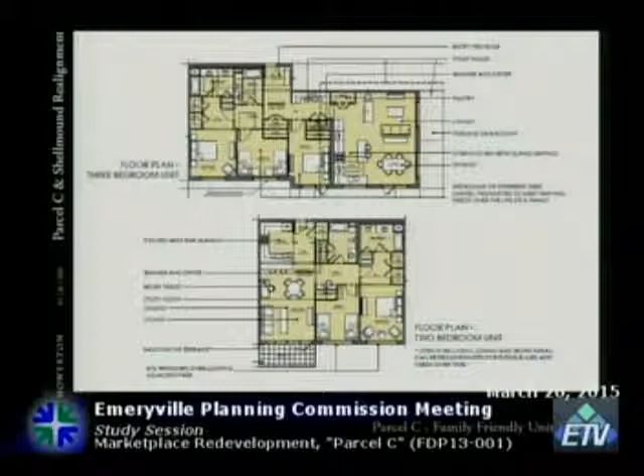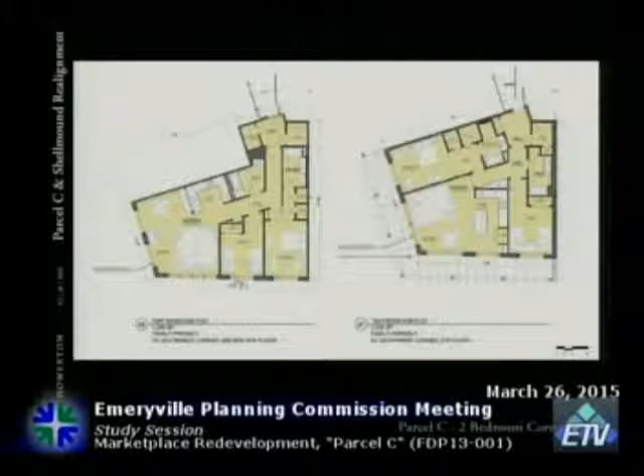Refining furniture plans for unique conditions. Again, we're trying to understand where we have a bay on a floor, we can have a living room kind of pop out versus where we don't. So it's just as the floor plans react to the buildings — upper floors with great covered terrace versus lower floors that get just a little bit more interior space. Just versions of 2-bedrooms, all of which are applying the same principles that we think are working really well.

So without belaboring all that, I just want to come back to the schedule and say that our hope is to really get into the ground on the street later this year, and then to go full blast on the grocery store at the start of next year, so that we can hand it off and follow quickly after with the residential.

Meanwhile, there's other projects on your docket, whether it's Parcel A or Parcel D, and the hope is that all of these are into construction sooner than later.

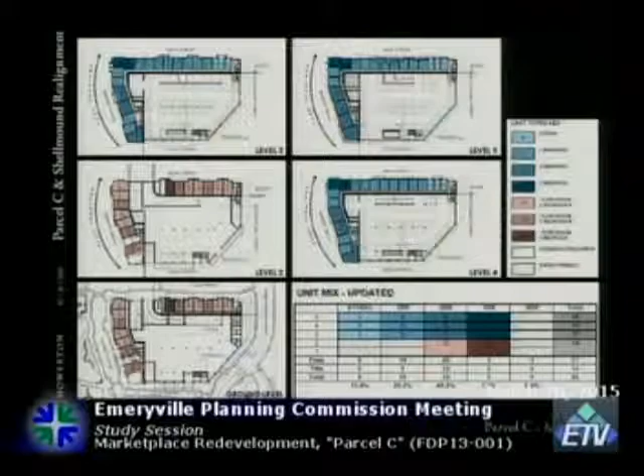It's a painted black steel trellis, not unlike some of the awning pictures we've shown. Sorry, not trellis, not the right word. It has a roof, and I'm trying to get to an awning image, really. So it looks like this from the side, where you have a C channel that runs around the outside of it. It has a series of steel posts, and then it has kind of a grassy planting on top, which is how they've done it before. We're hoping we can improve on that and introduce some color.

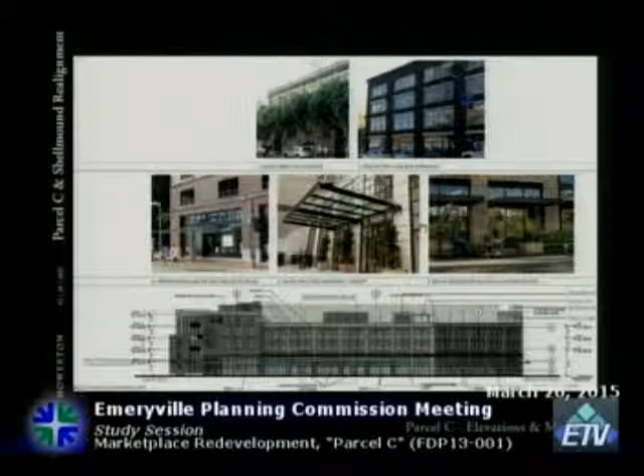Okay, but it looked like, from what I saw, that there would be awnings underneath it. Is that correct? Well, the idea is that on this side of the street, it would be this covering the entrance, and then as it turned the corner on the Shellmound elevation, it would have awnings suspended off the building. Oh, okay, so they'd have similar detailing, but happen in different places.

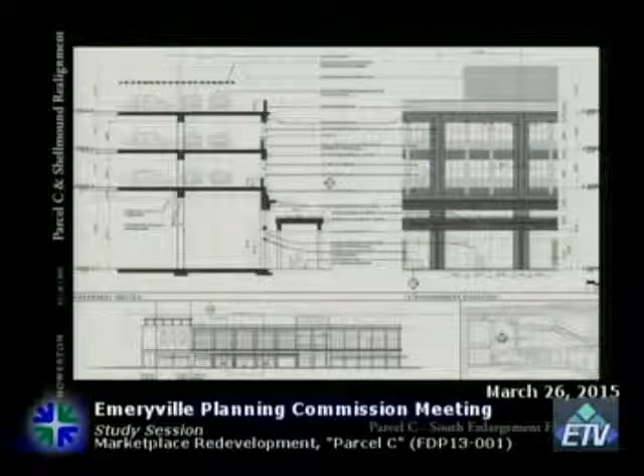You mentioned that the grocery store was not keen on the idea of a cafe next door to them. I noticed on the plans that space was labeled as retail. Were they also not keen on retail? No, the problem is that space doesn't really work as retail, because if you look at the plan, it's divorced from the rest of the project, and the retail energy happens along Shellmound, and this is off by itself, and it wouldn't work. It would be an empty, vacant space. So the only possible use would be a restaurant use, or a quick grab-and-go kind of food or coffee use.

Coffee doesn't work because we've already got an exclusive with Peet's, so we can't bring in another coffee user. And we were concerned about this being a space that would just not be utilized, wouldn't be leased.

The grocery store has an issue with regard to food, because within their store they have a presentation where they create different food products to go and eat and take away, and they didn't want to be competing against somebody right next door. They're also concerned about the parking that might be demanded from a restaurant, and it would take away from the parking they have.

This was something that was very important to them, and we've talked to them about this issue many, many times, and it's something they have not wavered upon.

So on the grocery store floor plan, at the front of the store, there's a little dashed-in box that says purveyors. What type of use would that be?

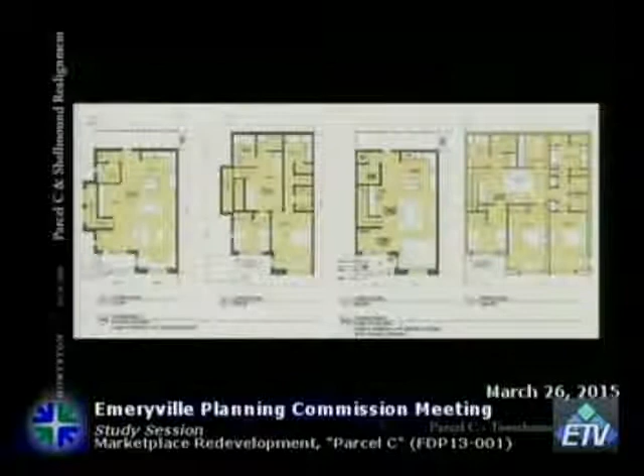So are you doing universal design on most of these units? Yeah, I mean, there's all these different words. We just sort of design so that all those things could accommodate. So in earlier versions of the plan, you'll see a bunch of dashed rectangles that represent all of those kinds of dimensions. They didn't make it to this version.

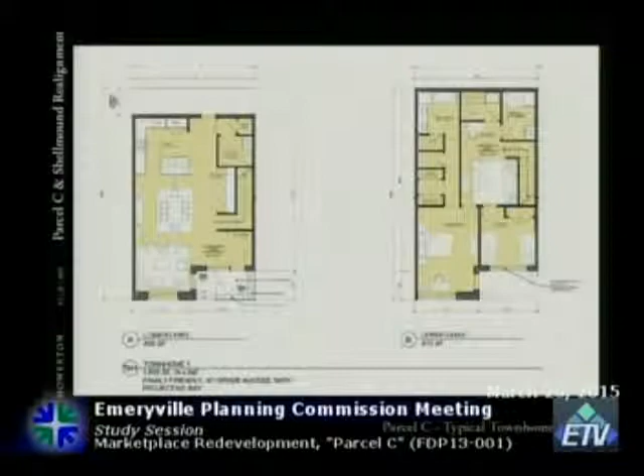Any other questions for the applicant? Yeah, in looking at this delivery schedule, there are areas where it looks like there would be potentially 2 or 3 of the large trucks that need to use the bay, and then there's another category for using the bay if it's available. What is the potential for stacking of these trucks? What is the situation where somebody's using the bay and someone else is going to be trying to get there? Where do they stack?

Well, how do you manage that? The way we've managed it in the rest of our projects is you have a dock master or somebody who coordinates the deliveries, and certain vendors are only allowed to come at a certain time, and if they come late, they're waved off. And so you coordinate those deliveries so you don't have that issue, and that's the way we've dealt with it in our projects. But as a designer, we toured all these projects and scratched our heads and said, how do you do it?

They've never provided more than one bay, and they realize it's an issue because they're in urban sites. And so the dock manager actually manages to a much finer grain than that schedule would imply. So I think, obviously before they open, a similar schedule will be built here and it'll be much more thought through.

But I think the understanding is there's no room to park a truck in the middle of this project and have it loiter in that way. So whether there are underutilized streets down the road, or they just stage their deliveries differently, I think it's a heavily managed operation. The other thing is that it's an incentive for the delivery folks to be in and out in a short time frame, because time's money for them. So they want to make sure they hit the windows they're allowed as well, because they want to get in and get out. They don't want to spend an extra hour there.

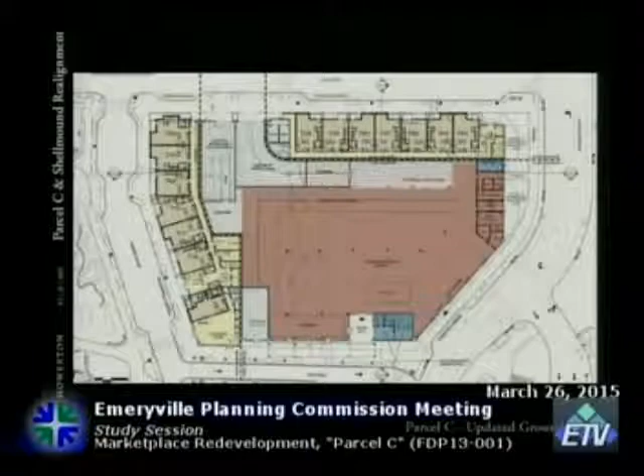Any other questions? Chair Moss? Yes, I had a question for the applicant. As you were considering alternate uses for that corner retail, did you consider childcare as a possible use for that corner?

We have not considered that. Would you? I mean, it's everything. We take a look at it, but everything boils down to making the project viable. We made a major move to increase the number of 3 bedrooms and 2 bedrooms, which makes the project less viable. We're dealing with other issues too, like the skin costs around the parking. The parking cladding alone is costing us almost 30% more than a normal clad parking structure would cost. So there's a question of what's the most important components to have in this project.

Since you mentioned the cladding of the garage, I think it was Parcel B, there was a garage and cladding we looked at a while ago in another study session, and I remember the feedback being pretty positive from the Planning Commission on that design. I'm wondering if you looked back toward that design to incorporate it into this one, and how does the cost compare to what you're planning for the other parcel that we liked?

I think the consensus in January was that we have a lot of work to do on that garage skin. Our research points to a bare minimum cost to do anything, and it's pretty significant - the more you enhance it, the more expensive it gets. So we're looking at ways to maximize the appearance, using all that research. We think this approach is a good one, reflecting things done around town pretty successfully, and we think it builds on and improves those. In terms of actual cost, it's significant.

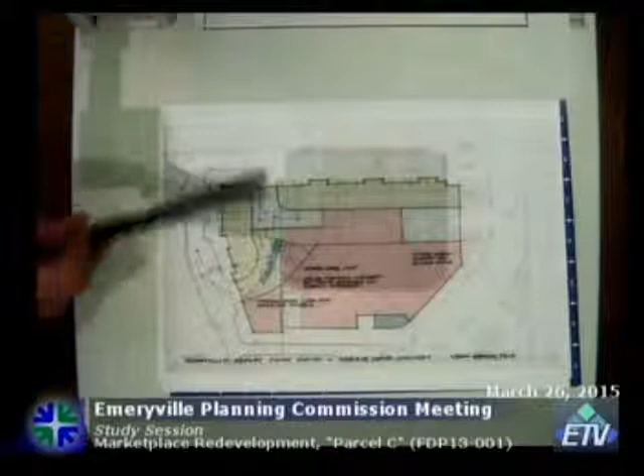The thing about the sound attenuation they're talking about, the insulation - many of us, as you know, living in the Bay Area, sleep with our windows open. Once you open a window to your unit, you've completely nullified any insulation created, so that becomes a moot point. Anyone with their windows open at 3 in the morning when these deliveries start is going to be woken up and won't be able to go back to sleep. This is a drawing done by an architect who lives at Christie Commons, Rod Heim, showing a drive-through delivery concept. Trucks enter the parking structure in the same location, pull in, back up within the building so they don't bother the neighbors, and then exit the front of the building toward Christie Park and out Market Street.

Rod said that he had given this to the developers and city staff, so I'm a little disappointed it hadn't been brought up yet tonight, but I think this is a very good option that should be considered. Thankfully there's this third consideration for the parking. In addition, the architectural styles of the townhouse, I think, are a modern interpretation of the industrial style and provide a good transition between the original brick warehouse and the existing office tower.

I think it's a very good plan, and I like the interpretation. I think the windows, being the great size that they are, make great connections to the surrounding area. As someone who will probably spend the rest of his life looking at this project out my window, I really rather like it. But I definitely think we need to see the return of the brick on that corner that they had taken away. I think that really kind of made the project a little cheaper.

And lastly, as for the temporary installation on the north and south sides of the grocery store, I was thinking maybe there could be more of a permanent solution in nature that can reside on this parking structure temporarily, and then become part of a more permanent covering on the east side of the parking structure for the garage on Parcel B that faces the railroad track. So they could do something here on this garage that could then be transferred over to the other parcel and become something more permanent. But those are my comments. Thank you very much.

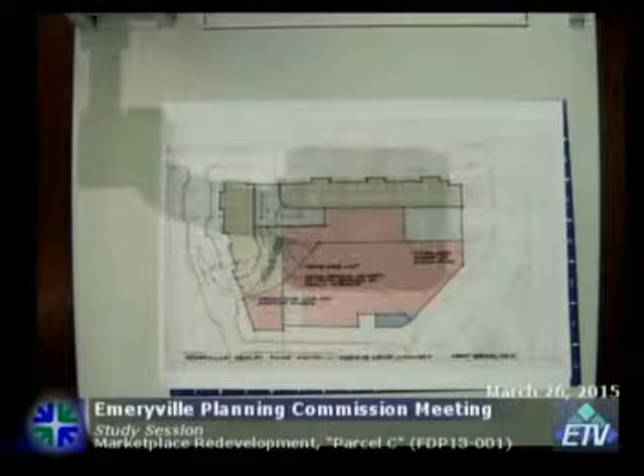Perfect timing. Yeah. Any other speakers?

All right, seeing none, we'll close the public comment, and we'll bring this back to the commission for discussion. Commissioner Gunkel, do you want to kick us off? Sure. Oh, actually, go ahead.

Sorry, I just want to make a comment about procedural items before we get started. I think we've heard a lot of discussion already about unit mix, and we've heard some of the applicant's thoughts on that. I think they are looking for some really clear direction from us, so I would encourage the commission to try to give them that direction. I just want to be clear that at this time, we don't have a policy or regulation related to unit mix. While staff may be in the process of drafting some draft policies, and our comments might inform that, I just didn't want anything we said tonight to be construed as any sort of policy on that. So I just wanted to make that comment, but go ahead.

Thanks. Yeah, I commend you guys on the progress you've been making. As I looked through the drawings, I started accumulating a list of some comments, and then I have to admit, I looked through the drawings first, and then I read the staff report, and I saw that a lot of what I had been thinking had actually already been covered by Arnold, which is great.